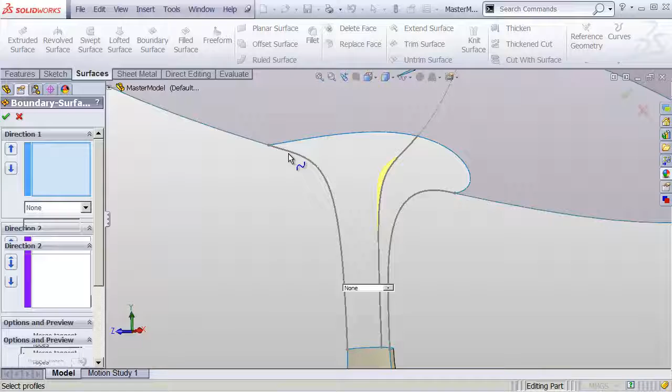We'll go to our boundary surface. I'll select this one, and that one to go through those. And then in direction 2, I'll choose this edge as well as the bottom edge. That's going to get us really close.

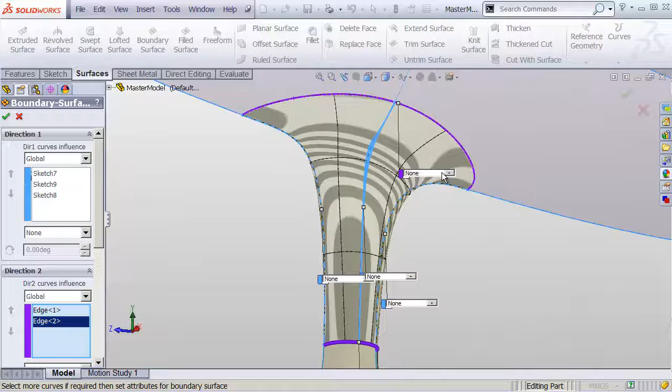We have a surface, but it isn't going to be really nice and clean and continuous all the way around these edges. So first I'll select this top edge, and I want that to be curvature to face. It's going to try to follow the curvature of that top face.

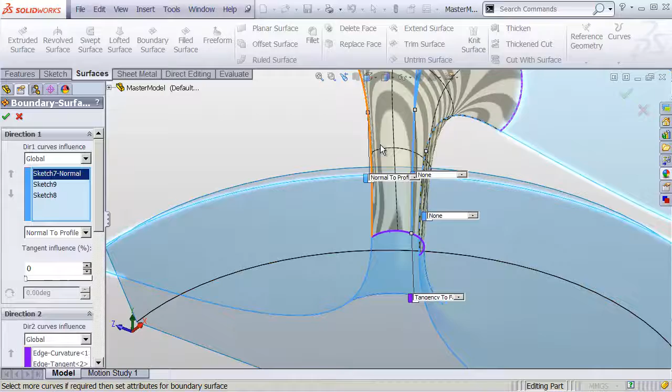Down here at the bottom, we'll go ahead and do tangency to face, so it comes straight up from the bottom, and that'll be fine. And then over here on the sides, we'll make this normal to profile, so that's going to shoot straight out from the right plane.

And then on this other side, we'll make this one also normal to profile, and that should be pretty good as well. Then let's just scroll down over here and we'll see where these guide curves were.

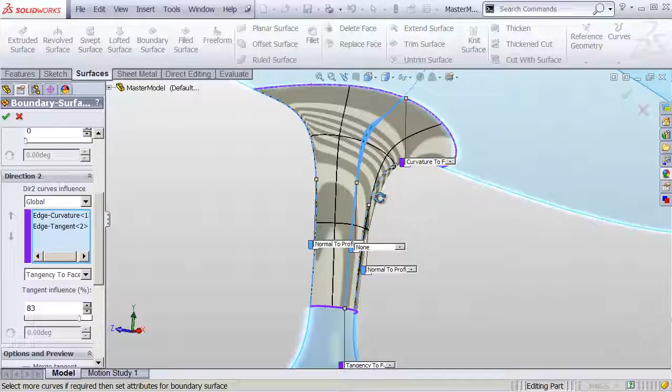I'm going to take the tangent influence and crank that up pretty high so that these guys will be nice and straight. But then also I'm seeing some pinching happening on the other direction. What if I crank that up too? Is that going to get nasty? Actually, that looks pretty good.

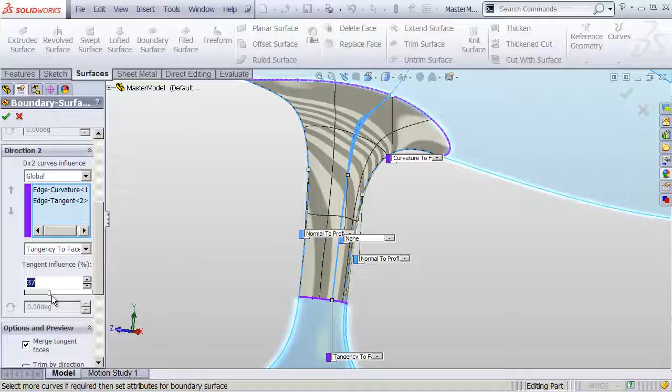I just cranked that all the way up. You just kind of experiment with the tangent influence parameters for these two different sides and see what ends up looking good. Sometimes it'll end up looking forced if you force them both to be too strong.

So a good way to evaluate it is to hit OK. First of all, let's apply another color to this. I'll make this one green to that body, so we've got separate colors to look at.

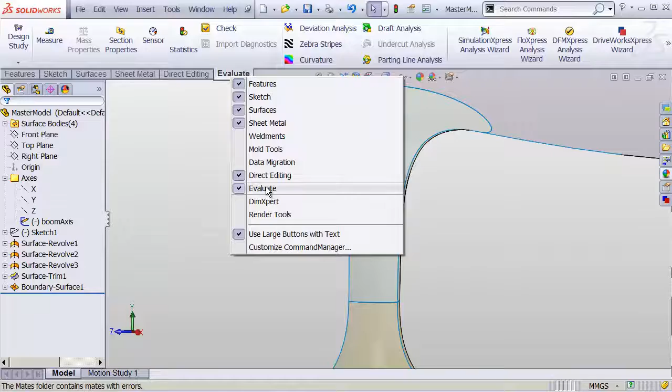But then I'll go to my Evaluate tab up here. If you don't have the Evaluate tab, right-click, come down to Evaluate to show that tab. Turn on your zebra stripes and take a look at them. This actually looks really good, right?

The way I know this looks good is I'm looking for the zebra stripes to connect as they cross this border. If they connect, if they're touching there, that means at least our surface is tangent continuous across those two, going in the same direction. But if they look smooth and flowing, as these ones do, that means we have curvature continuity, or the same radius of curvature where those two surfaces meet.

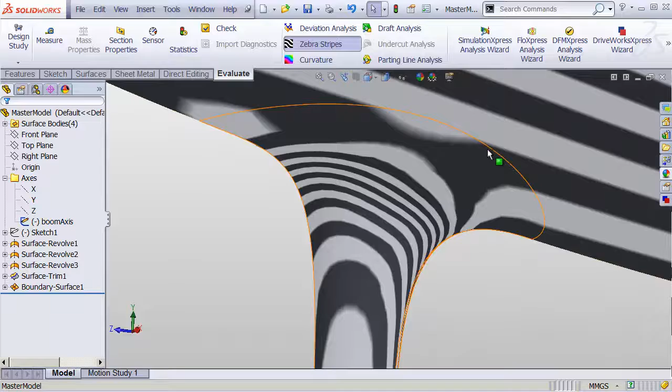They look really nice. Down here you can see this comes down and it touches, so it's tangent continuous, but it's not smooth and flowing, which means it's not curvature.

But in this case, we're going to break this anyway. This is going to be a cut, this is a pivot location, so that doesn't need to be curvature continuous. It's totally fine the way it is.

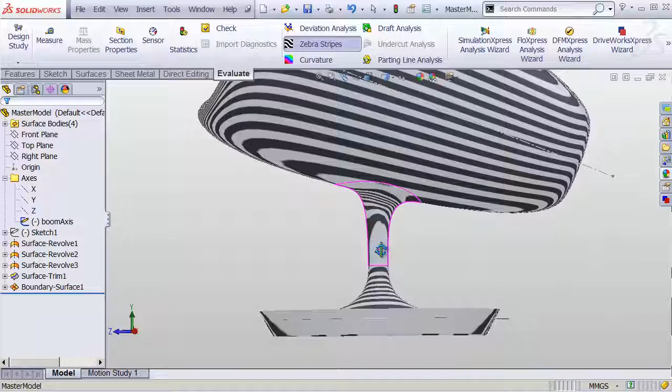I'll turn off the zebra stripes, and we're ready to start finessing this thing. Let's close this, save it, go back to our main assembly, see how this is fitting. It actually looks like it's fitting pretty darn well.

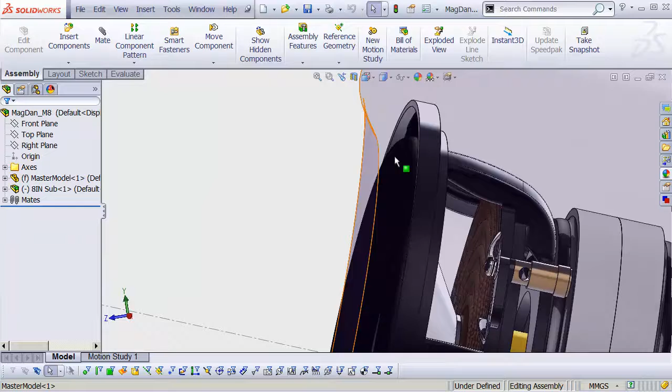But it looks like our speaker surround might bump into our exterior housing, so we might want to adjust that a little bit.

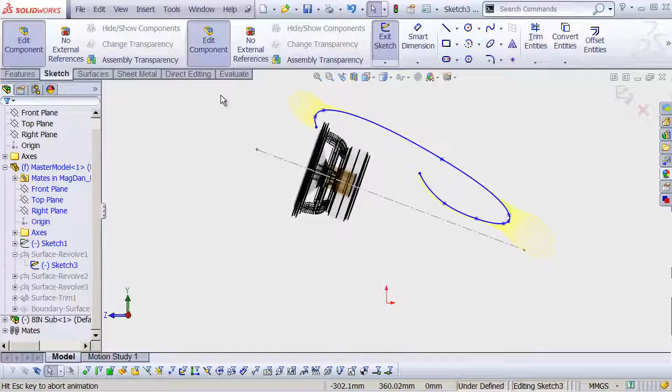So to edit this in context, right-click on the master model, click on Edit Part right up above here. I'll expand this down, go to that very first revolve and edit the sketch for that revolve. Look normal to it. I'm going to use my handy Alt-F to zoom in here just on that.

Hit Escape to drop that tool, and then I can just drag these points around to adjust this to just the shape that we want.

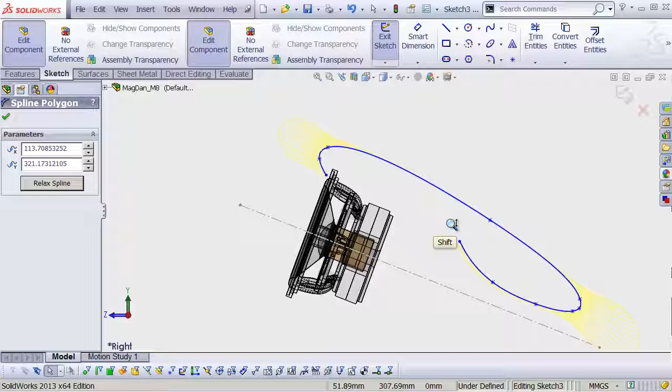Something like so. I want this to be a little bit convex here. Yeah, that looks good. Exit that, and we're all updated. Beautiful.